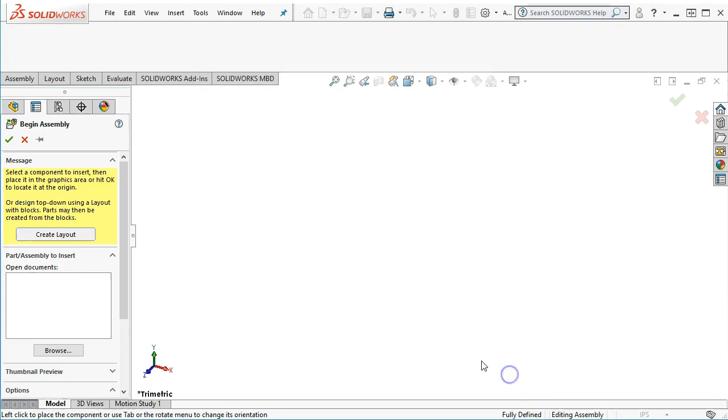Right, so as we go through the process, right now it automatically asked me to bring in a part, which I didn't really want to do, so I'm going to cancel out of that. I don't mind that it starts the command, but I really don't want it to do an automatic browse—that's kind of annoying. I don't mind the preview though.

Making virtual, in a sense—that's what the parallel experiment last week was doing, having virtual components inside an assembly that were being driven, that had those buildups to other pieces. I don't want to overload you with SolidWorks terminology, but give you enough background that you can see where these terms come from.

And then an envelope is a way of managing how big, kind of where the parts all fit into. And the rotate context toolbar—once we pick a part, the little box will come up and allow us to manipulate and maneuver. All right, I don't want to do any of that, so I'm just going to close the begin assembly.

All right, so where I made my first mistake last week was we pulled the parts in, and I made an assembly, and when I went to make those in-context parts—that top-down virtual components for the parallels—I had not saved my assembly. So file structure and documentation, we need to decide on that early on.

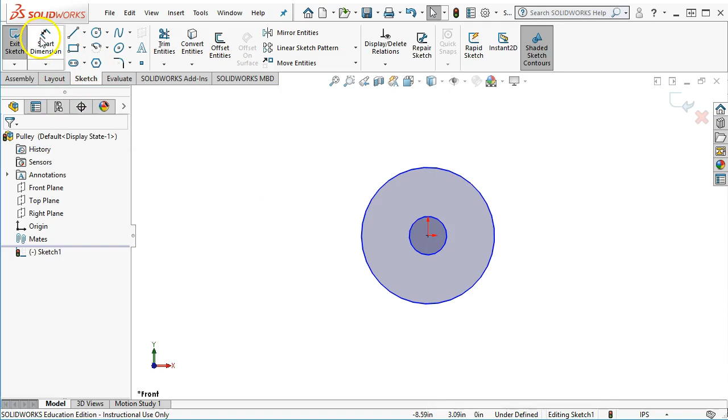And then on the pulley side, I want this to be pretty good size. I want it to be larger than the 2-inch pulley wheel that we had, but I don't want it to be so humongous that it becomes something difficult. So pretty close. I'm okay with the 4-inch, just rounding. And the thing to keep in mind going into the design process is this is an evolving process. I'm making hundreds, if not thousands, of little decisions every step through this process.

All right, and then this is kind of our jumping off point, that as soon as I step into this, I look past those specifications of I want a nice, smooth, rolling surface. I want to be able to hold an 1/8-inch wire that has some twist to it. I want to be able to mount this thing in kind of a clothesline configuration to where I can feed it out and feed it in as smoothly as possible. All right, so there's those verbs that are telling me these are going to be a little more critical when I translate that into the geometry.

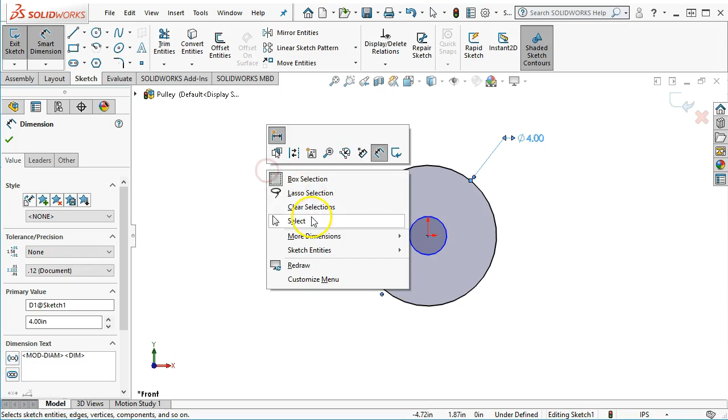Okay, so one of the things we can do, and I like McMaster. So we pull up McMaster.com, and I type in bearing, and we have bearings and bushings, and I would like to just have a standard ball and roller bearing, and I think I double clicked there when I shouldn't have. All right, and then we start again kind of going through how much do I need, what do I want to spend. This is not high speed, there is a little bit of load, but I think I can probably get away with a standard ball bearing.

I don't know that I would want to go to a light duty, use these bearings where high speed and precision are not required. Well, I do want a little bit of precision, so maybe not on that mix. I haven't seen the hex bore. Those are kind of cool. Electrically insulated. That would be kind of nice if we were going to drive this or had any kind of static coming off of our system. So let's just go into the standard, and then we'll pick a style.

So the open style is, all right, so when we talk about lubrication, permanently lubricated and shielded, and then actually going to sealed. So you kind of look down through the descriptions, dissipate heat, block out dust and contaminants. That's kind of important, especially if there's any kind of plastics that are going to rub, and as they rub, they're going to pick up the dust or create their own dust. And then the sealed bearings block out dust but retain the most heat.

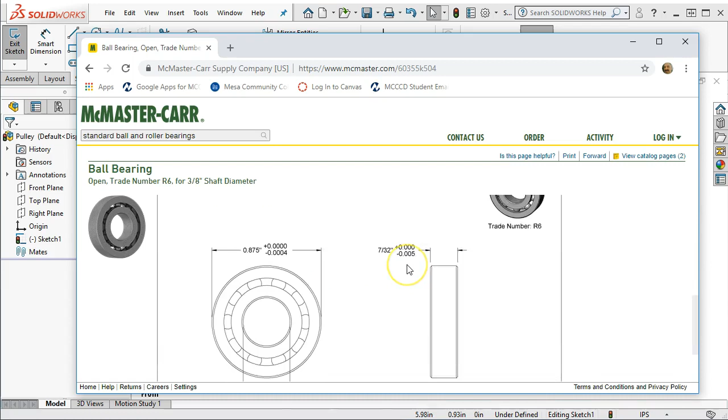So when you're dealing with a company product, we can come over and we'll see that, yeah, I think $6 is in my price range. The OD tolerance of -0.4 of a thousandths to 0. Okay, then I can fit that. And the width tolerance isn't so much of a concern. And at 220 thousandths in width, yeah, I think that would work out on my design side.

And I want to save this to a 3D Solidworks. So it saves. It ends up going over into the downloads folder. Well, let me see, I'm kind of bouncing around here. There we go. So we go into the downloads. I'm going to pick that ball bearing up, and we'll put it over into the documents. All right, so I don't need that right now, but since that's my selection, that's what I'm going to go with.

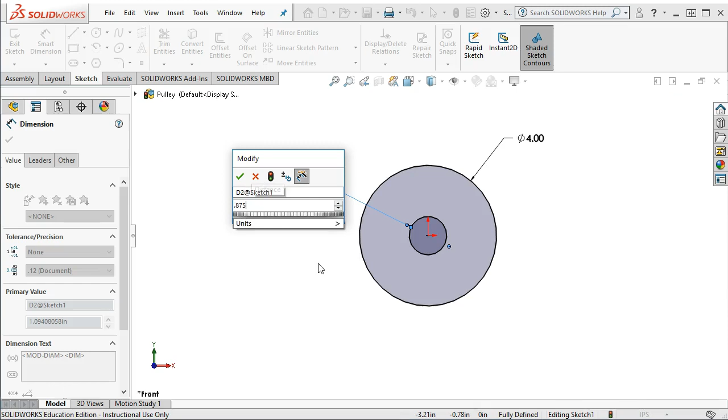All right, so on the design side, I have a theoretically perfect. These pixels are out to millionths, if not billionths of tolerance. The mathematical calculation is that these drawings, these models are theoretically perfect. So the decision we have to make is, do I start out tolerancing them? Probably not. I want to go line to line because that's going to be my fastest way to develop the concept. If I make changes and go through the rest of the process and it all falls out that at the end of the day, that's what I end up with, then great.

If I start making changes when I have a 90-95% complete model, my design is, I am fully committed. We've been through the design review. Everybody's happy with it, or at least I'm happy with it. Then we can go ahead and start thinking about tolerances.

All right, so the 0.875. The one thing that I did not catch is that under the units, and let me fly this in, I do want to work in 3 or 4 decimal places though. And again, depending on the precision, it may be to our advantage. We are in inches. It may be to our advantage to go to 4 decimal places, but at the very least I want 3. All right, so when I type in the 0.875, I'm seeing 875, I'm seeing 4.000. All right, so that is the body of my pulley. So my first 2 decisions were really just setting up this diameter and coming to that conclusion.

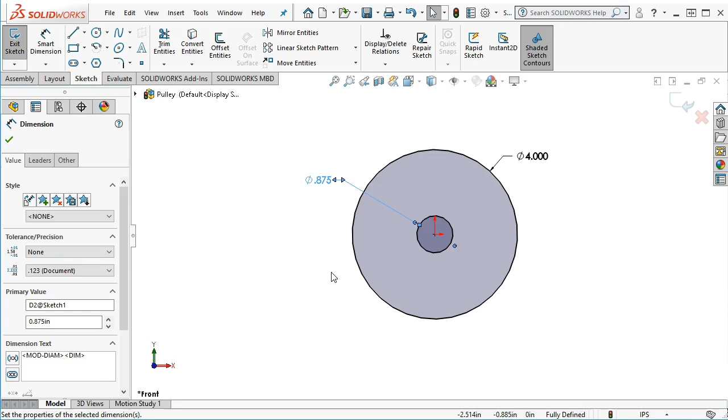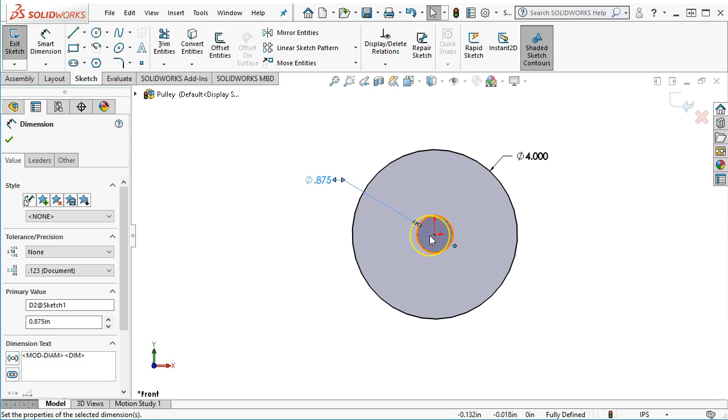All right, so if the bearing face or the bearing OD is +0 -0.4 of a thousandth, then I probably want to make this hole about 874. So there's about a thousandth press fit. All right, I wouldn't want to go bigger. So I got to kind of start thinking that process of how much material am I going to have? What is the most material that I can build into this and still have a working element when I get done.

All right, so this needs a housing. I want to tie this together. So I'm just going to use a center point rectangle and say it looks something like that. All right, so one of the things with the design, and especially on the concept side, is this is going to be a little messy. There's going to be some chaos, and it's by far not going to be perfect going through the first round. All right, so if I were to make this, let's go 4 1/4 inches. So just 1/8 of an inch over size.

And I'm not sure that I want these to be equal. So going back to the relations out of SolidWorks, 4 1/4 by 4 1/4, this may end up being 4 1/4 by 5. It may end up being 4 inches by 6. I don't know yet. All right, so in this case, I'm not going to start driving relations that may end up being in conflict later.

If I can look into that magic crystal ball of design intent, dealing with all of our tolerances and all of our stack ups and everything else, and also be able to see where these relations are going to end up, then I'm going to build in some of that intelligence early and often.

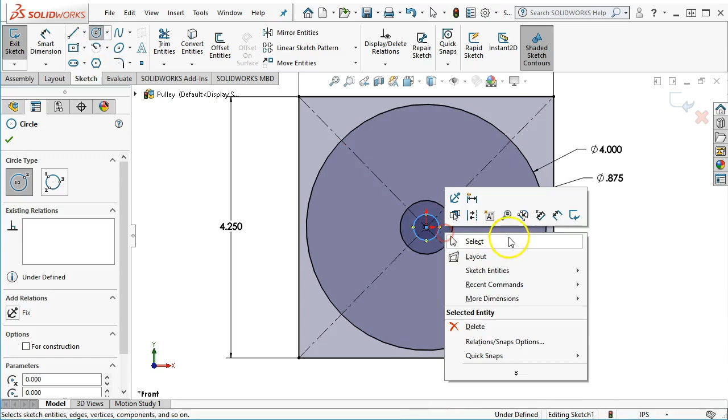So if this is my mounting plate, and let's see, what is another critical piece of information? I need a 3/8 inch hole, and I'm not sure if my load calculation is going to require a bushing to be pressed in so that it can carry. And my materials, we haven't really talked about materials.

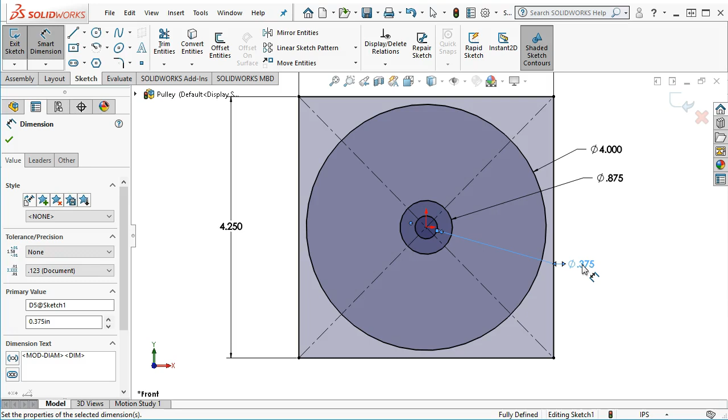I'm thinking aluminum. It has to have some wear resistance, but the amount of use it's going to get over its lifespan, I don't know that it's worthwhile going up to a steel on the pulley side. And aluminum being relatively easy to machine and manufacture, I'm thinking that worst case,

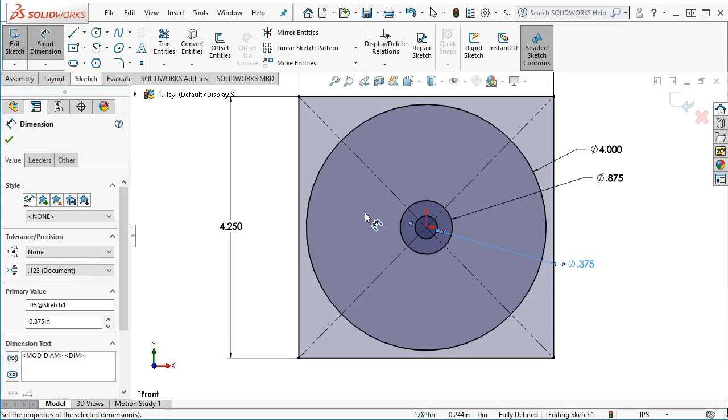even if I wear this one out, I can make 10 or 20 more once I have the programs, once I have the product developed, and then decide, we've run through a bunch of pulleys, it's time to make one out of steel or stainless steel.

So that being the case, I said I was going to have a 3/8 shoulder bolt. We need to look at that stack up of how those are going to work. But a 3/8 shoulder bolt is going to have a plus nothing dimension, or typically a plus nothing dimension. So let's take a look at our shoulder bolts.

Okay, shoulder screws, and we'll probably want a precision. So I'll spend a little bit more money. To go slotted or hex? Natural tendency is just to go hex, with the hex key for the tightening. So shoulder length, I don't know yet. The thread length, 1/8 of an inch. We're in the really small ones.

I need to scroll down a little bit. All right, that looks a little bit better. So plus nothing minus 1/1000th. So that bearing inside diameter, I didn't grab that one on my list, but we're going to look at this being a minus dimension. So minus 0.001 to 0 on the diameter. I should have taken a screen snapshot. Maybe we'll back up and do that.

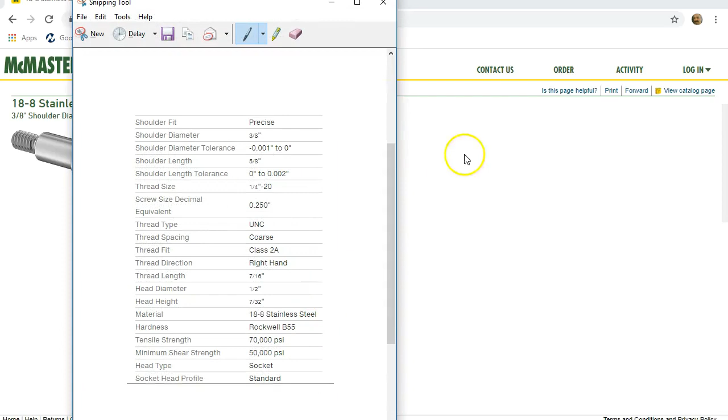And when I save this, I'll save it back to my project. So as we're accumulating this data, the purchased components have just as much effect on my tolerances and my decisions as the parts that I'm going to create and manufacture. All right, so if I back out of that, maybe back up a couple,

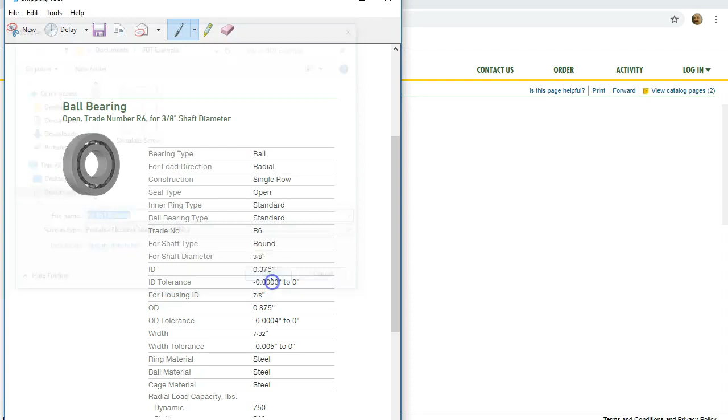okay, so same thing, ID at .375, ID tolerance minus 0.0003, and the OD tolerance minus 0.0004, so we will create a new one, and maybe this time I'll throw the ball bearing description in there. So some form or fashion, whether I print this to a PDF, I need to create that documentation trail so I can reference back to it. And I think that was an R6, so okay, we can get that out of the way.

And then we'll file that one. Okay, so each of those components, each of those pieces becomes part of the effect. All right, so I need to be able to clamp this together, have it act as a shell. We have lots of choices. Each of those choices comes with an associated part.

So if I were to wrap this, I'm going to have a lot of stability if I put a 1/4 inch or a 3/8 inch plate around this, and I would have to grow my mounting plates by an associated amount to leave room for those points. So the other option would be to put a standoff, and the standoffs I could hold pretty decent tolerances, just having a small ring.

And then also it would satisfy the, let's see if we can jump in here, let's see, those are going to be threaded connecting links. Okay, so if I have a carabiner or a threaded connecting link, I need to hang this, attach it so that it goes to a post or whatever. And so if I just were to loop that, I'm concerned about the opening width. I would like to have it for stability meet most of that size and not jump around.

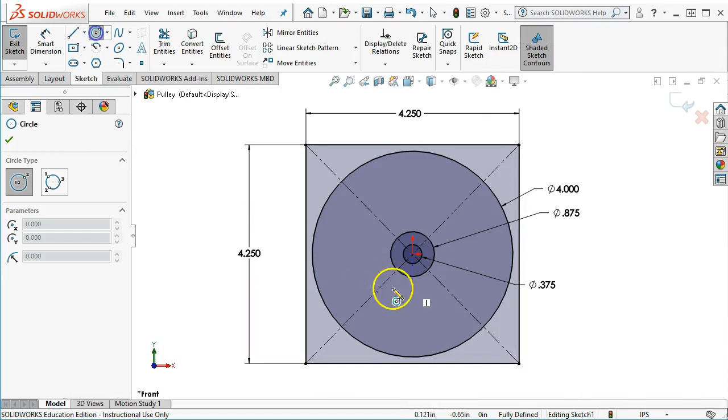All right, just that quick math tells me, am I going to be satisfied with a 3/8? The other thing is that 3/8 on the opening, am I going to be able to force an actual 3/8 in there, or is that not going to be big enough? All right, we've got to start somewhere. So I'm going to come up here to the corner and I'm going to put my first post.

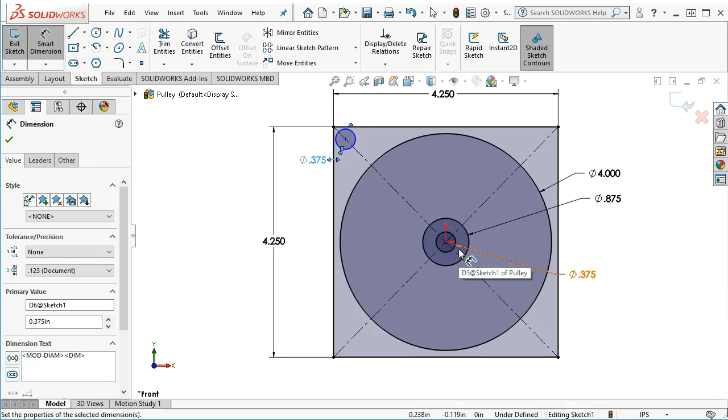And to go through, so after we overkilled this with a 3/8 shoulder screw, which gave me a decent sized bearing, now I'm looking at going to a 10-32 for clearance. So I'm going to put in another piece, and 375 on the diameter. I may have to shrink that a little bit once I determine if that threaded link is going to be able to tie in.

So on the Solidworks page, I think I will have to put it on this page as well because it's one of those handy things to have. We have a formula. So a 10-32. If we're working in metric, that's kind of a different set of clearances, but we're still in the same numbers. So a number 10 times 13 plus 60 should give you 190. We divide that by 1,000, that will give you a major diameter of 0.190.

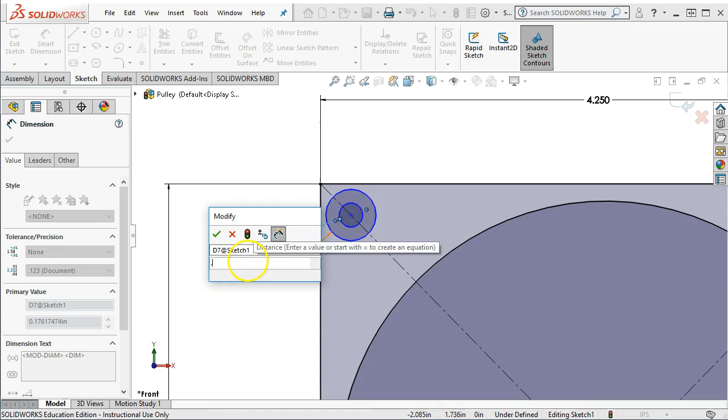And then depending on how much I want to allow this piece to move, right? So if it's at 190, but manufacturing processes, it's going to be about 187, 188, so right there at 3/16. I don't want to have to pound it in, but I don't want it floating around so much that it becomes kind of a headache as far as assembly or otherwise. So maybe we'll go with the 190. And again, that's something that I would want to tolerance later on.

All right, so coming off of the side, that loop is going to kind of come around this way. There's a little bit of gap. The thickness at, let's see, that thickness at 9/32 was that it? Probably need another picture. Let's see. Yeah, so this is where being able to manage your fractions comes in handy. 9/32 is 281. The bearing that I picked was 7/32, and that would be 219.

So there's a little bit of an issue all of a sudden with the thickness of this piece unless I want to do more design and create clearance in these plates to make that work. All right. Decision on top of decision on top of decision. And we have all of these decisions to make before we ever get to the really serious tolerancing. All right, so I'm going to kind of speed up a little bit here.

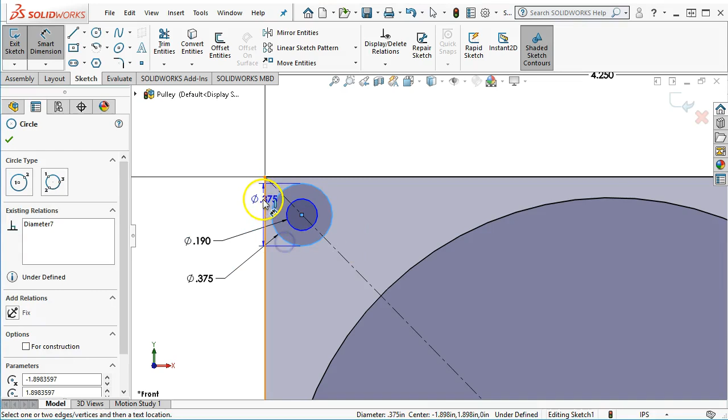We'll give it at least 1/4 of an inch. That puts it in place. We'll go with a couple of center lines, and I'm looking for the origin over to the midpoints. And at least for right now, I think that I want this to mirror. And then I'll take those 4.

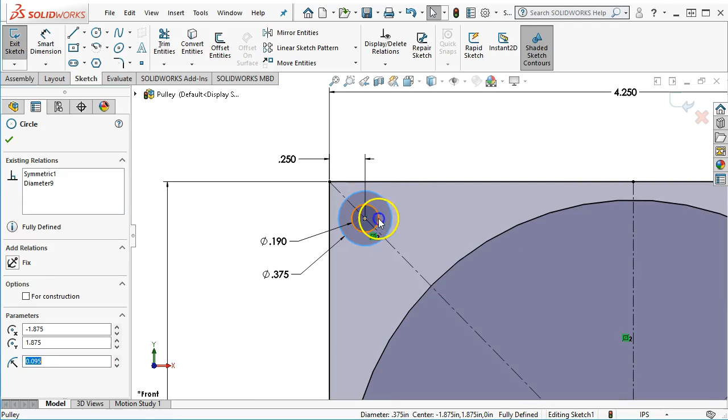And after I have the 4 corners, then that gives me a location for those pieces. So I think we've spent enough time with the design portion of it, considering those tolerances, building up into those tolerances, but it's time to make some parts. And let's go ahead and make sure that it gets saved.

Oh, that was interesting. I didn't think I told it to. But that did the end result. And so my sketch 1 that has all of this geometry in it is now going to be a layout sketch. All right, so again, I'm going to provide you with these parts so that you can put them into the drawings to apply the tolerances, the dimensions, and go through that sequence.

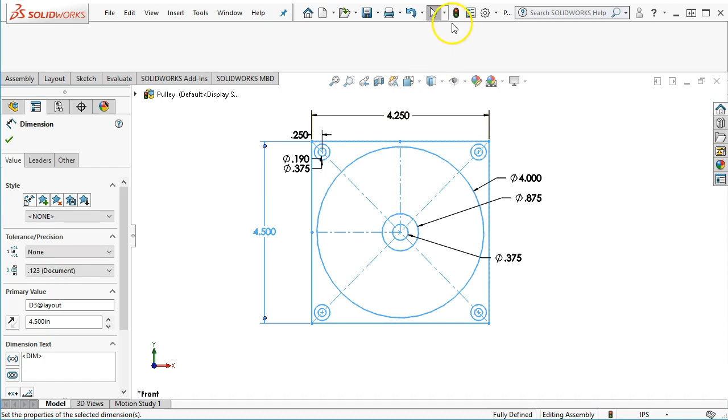All right, so looking at this, one small problem, one very big problem is that if my cable comes over and wraps around the pulley this way, I've now run into 2 of my standoffs. So I'm going to have to make adjustments to my height, to my geometry. This is where it plays out. So if I go up to 4.5 and then rebuild, well, I'm still not quite tangent.

So I'm going to go back into that sketch and we'll use the center line. And I just want to see, I'm envisioning the wire coming in from the right there. So bring it off to the side. And so, well, I don't know why I did that. So apparently my left button is a little touchy.

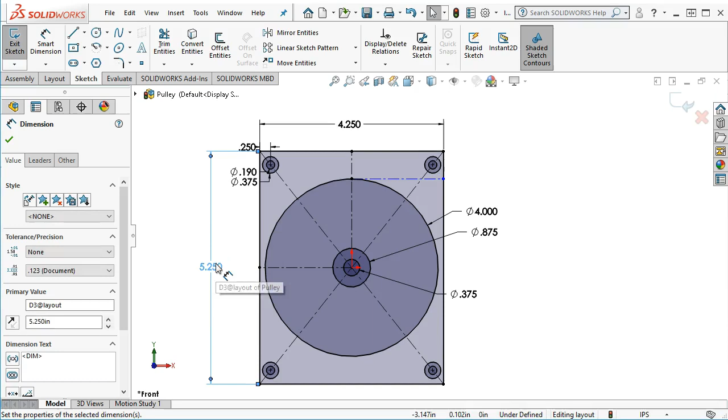All right, so at 5 inches in height, all of a sudden the cable is just barely clearing, and I don't want it to rub on the bottom side of that. So maybe we're up to 5 1/4. All right, I don't think that's going to affect the balance, but I now have enough clearance. Oh, I guess I should make sure, since that didn't get a horizontal relation, now I have enough clearance that even as this moves around, it may rub on the standoff, but it's not going to affect the clearance.

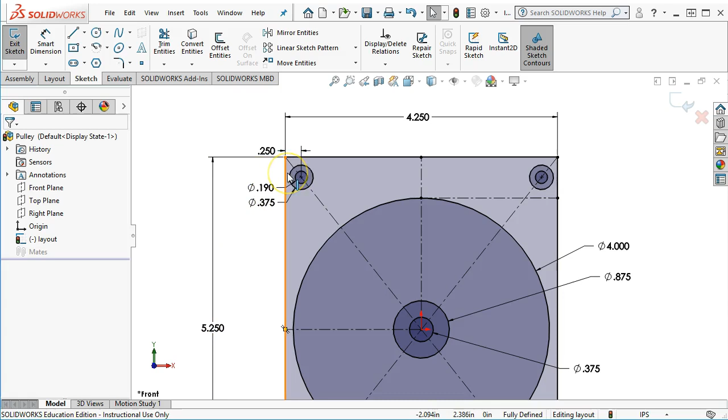So the other thing would be that at .375, if I was to bring this up closer to the corner, I really don't need this extra material. So as I play these what-if games, if I bring that down, do I want to go to the fractional? Yeah, let's go 3/16 on the fractional. So .1875. And now I have quite a bit of clearance. I can bring that down to 5 inches. I'm still at a nominal size.

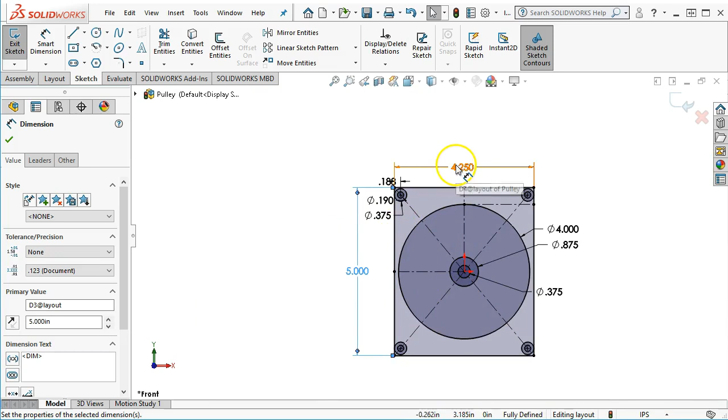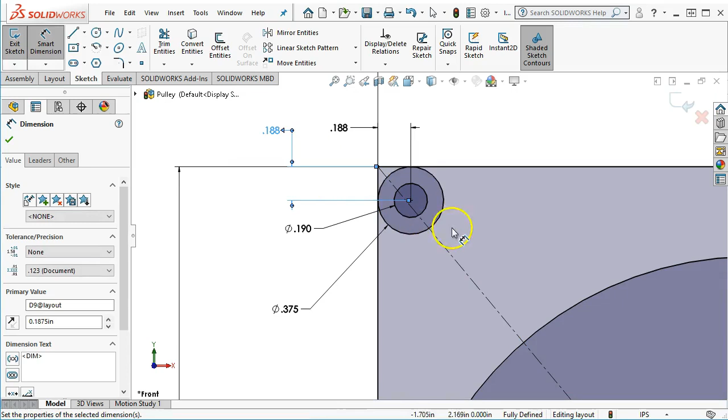And at the very worst case, is it going to hurt anything if, and because it's not a square anymore, my assumption of the relation now has a small problem with the gap up here. All right, so do I want to make this 5 by 5 so that I can keep the 45 degree? Probably not. I think it's going to be easier, understanding the problem with the relation, that I can break that coincidence. Come back, .1875, and now I have tangency to both corners of the part. And I can check it against each of the corners, and now I have a lot more clearance.

So can I get to 4.75? I'm trying to minimize my material usage. No, right back to where I started. 4.875. Okay, maybe. But I'm having the gut feeling that 5 inches was a good number. All right. So in the design process, we're going through what are our nominal numbers, what kind of dimensions can we get away with, and then once we have those dimensions, now we're kind of into that point where we can start building.

All right, so we go back through what we did the first night of safety. Do I have pinch points? Am I going to hurt somebody with this? Am I going to hurt myself, because I'm probably going to be the one operating this? As I move this back and forth and I'm running the cable in and it catches, I have this opening. I haven't even created any of my 3D parts yet.

But those are the things that I'm starting to think about, is how can I minimize, eliminate, otherwise make this thing safer. Well, part of the problem is going to be until we actually have something that's operational, I'm not quite sure where that one's going to fall out. All right, so let's go with.

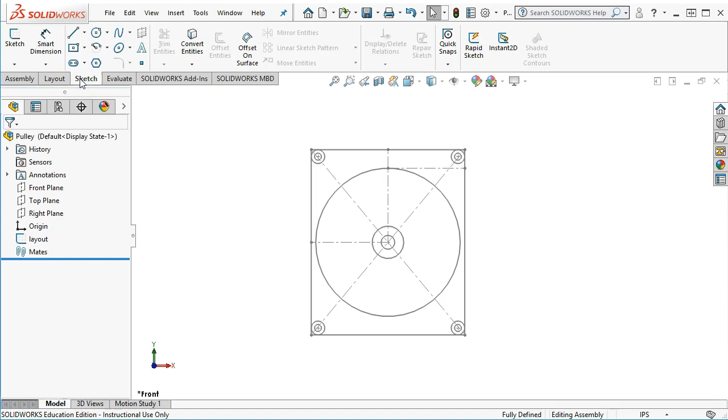Okay, well, we have the layout. In SolidWorks there is an actual layout, and because I've run into problems with the layout and it hasn't really been satisfactory—I haven't checked it in 2019, so I will have to create my 3D sketch and see if it operates the same way I'm used to, and whether the layout sketch creates problems, or if the create layout versus the lowercase layout is still the better option. Either way, I have this sketch that's now going to drive 3 or 4 parts.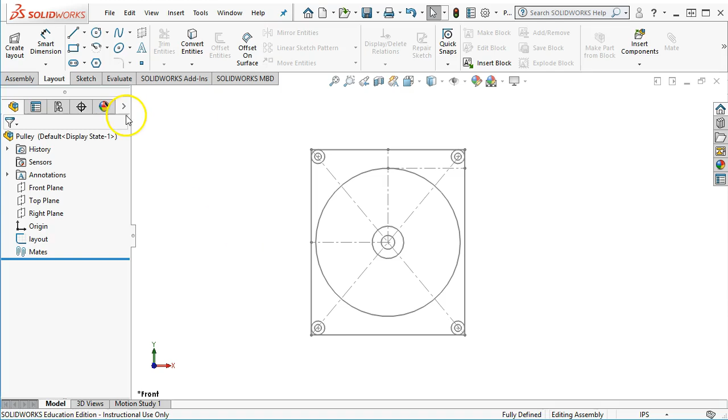So to make that happen, we're in the assembly, and under insert components, I'm going to create a new part. I don't really want to tie it to a plane. And looking at the terminology now, this part is going to be fixed. You do not want to float this part, period. End of conversation. Very bad to float the part in this situation.

Any virtual components, any externally referenced components, they need to stay there. They are being built in reference to this sketch, and anything you do to move them needs to be driven out of this sketch, not the part individually. We can make modifications, but this is that risk element we're talking about.

And then the other thing is with the brackets—these are now virtual components. So our first pass through, these are all going to exist in the assembly. When I take this out into the drawing, I really need to have these 4 separate components. I can do the virtual components, but it makes it more difficult, not less.

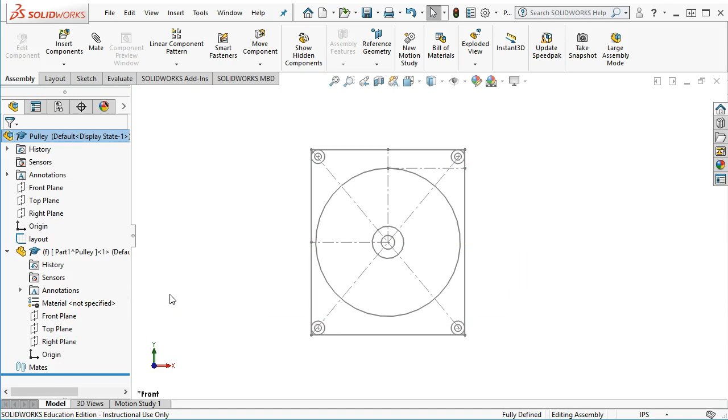So if I expand that out, there's just the normal part that we created, our 1, 2, 3 block. We created some of our pieces with it, and I need to right click and edit the part.

And on the front plane, which now lines up with the assembly, I open up a new sketch, and I think I want to do that pulley first.

So the choice is, I automatically went in to draw the circle, but the choice is that I can convert those entities. So by selecting the sketch item and converting that entity, it's now tied directly to this layout sketch.

In my experience, I have a very high hesitation to tie virtual components and top-down assembly parts to each other, part to part. It does not bother me to tie it to a layout sketch because it's a single point of failure.

Right? If I have part 1 and I tie parts 2, 3, and 4 to the part before it—so part 2 is tied to part 1, part 3 is tied to part 2, part 4 is tied to part 3, and maybe part 5 is tied to part 1 again—and all of a sudden I delete part 2, thinking 'oh, I don't need that one,' I've pulled that one strand of the spider web that is going to cause the whole thing to collapse.

If I have a single point of failure like this sketch, I pretty much have one place to look. I have one place to create those problems and to deal with that point of failure.

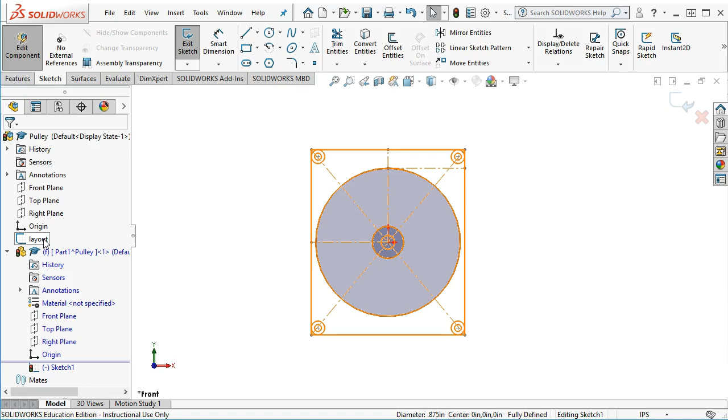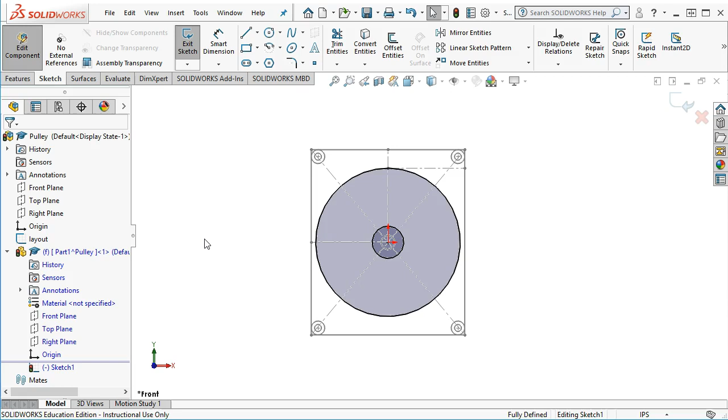So again, this is kind of on the design side, the advanced portion of it. I want to give you the how I got there and the process of making those decisions before we start putting numbers on it. It really does look from the outside haphazard, and to a certain extent some of it is—we're taking our best guesses and building everything we know into these geometries.

So my next one, I could have created a sketch that would also set the depths. A lot of times I would create a 3D sketch, but I figure I'm going to have everybody looking at me like I'm out of my mind anyway, so putting the 3D sketch into the mix, not yet. We'll play with that one a little later.

But this is just like we're in a part, and if I had any other components, they would be in transparency, and the blue is telling me that I'm in that top-down assembly.

I'm editing that part, so we're going to extrude, and I think my 0.22. Now bearings usually have a little bit of relief, so the 0.215. On the manufacturing side, if I'm doing my due diligence and saying I'm probably going to start off with a piece of 1/4 inch, I'm not really going to grab a piece of 3/16 because it's already close to a 32nd undersize. 15 thousandths aside I could probably live with, but if that bearing really took a load, I would want the interface to have a bigger contact patch. So I really want it close to the 218 to the 220 that we talked about.

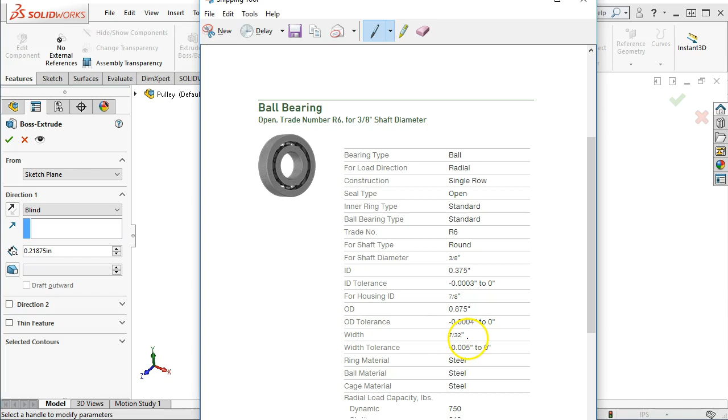So my first guess, 0.21, well, 21875. And I only know that because I've done it a million times. Okay, 10,000 times. 7 divided by 32 for my 7/32nds. 0.21875, which comes back to what we set for the thickness out of the catalog for, now I can't see it, it's right in front of me, the width of 7/32nds. And a plus or minus 5, that becomes part of the deal.

So going to 1/8, maybe I want to take that down to 210. All right, 4 thousandths aside I can deal with. 15, 16 thousandths aside, I'm not so sure about. All right.

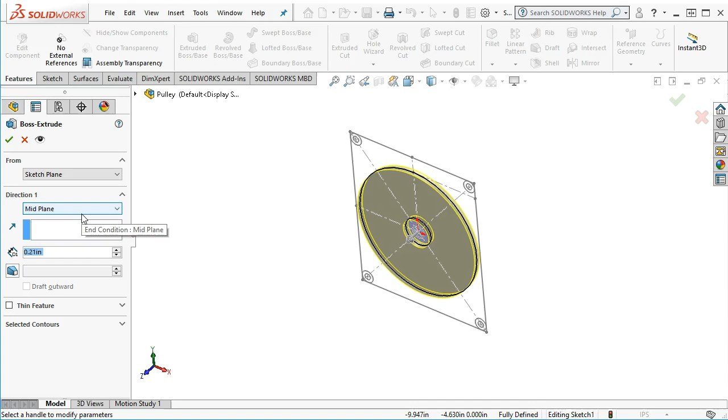So the other thing would be I wait until the bearing's been delivered and I measure it and say, oh, I want it to be the exact same size, but we really don't have that luxury. All right, so I'm going to make it a midplane. I'm going to build this all on the midplanes so that we can drive those dimensions.

And so that creates a pulley. And then I want a V groove. So I'm not going to set this up in a lathe. I'm going to take a 4-inch chunk of material and try to cut to the center.

I'm going to clamp this down in the mill onto a tooling plate, so that whole stack up of subplate to vise to parallels to material, or basically just go from the table of the machine to the subplate, and then I have my clamping. All I have to do is make sure I have the flatness between the table and the subplate, and then that my clamping surface is also flat and perpendicular to the spindle, to the head of the machine, to the tool.

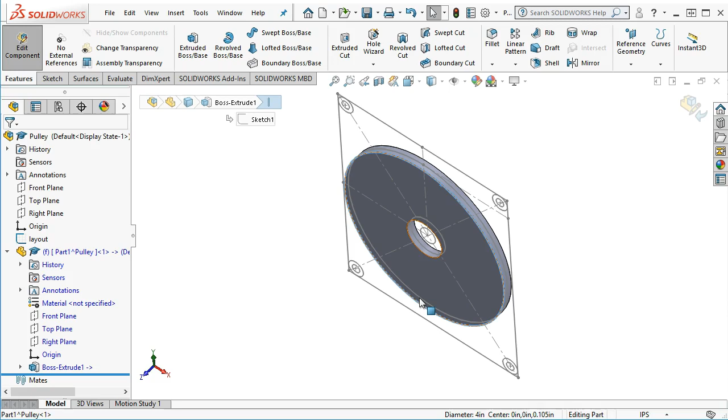All right, so that being the case, I don't have a problem starting off with this material, clamping into 4 corners and machining this flat, and then cutting around the outside, flipping it over and maybe taking a skin pass. Or for that matter, 4x4, I think I could probably hold on to a 1/4-inch piece, take a skin pass, ensure that I have that flatness on the first machining operation, and then flip it over onto its flat to flat, clamp it down, machine this side to be parallel, and then make the outside and the inside cuts.

All right, so that's a lot of machining jargon that if on the design side you don't take into at least some account. Back to one of our first rules was the drawing does not dictate machine process. Right? We're going to suggest, we're going to think through whatever our experience. I'm certainly not going to make this with a hacksaw and a file. Right? And so going up to, even if I put this, I drill the through hole and I clamp through and I turn this on a rotary on a manual machine, I'm still going to have to pick equipment that's capable of holding the tolerances that we're determining in our process.

All right, so let's see, that is on the midplane, so I'm building out symmetrically. And so the bearing, so I need to get out of this. Oh, no, I don't. One more. So I'm going to go ahead and complete my design on the top plane.

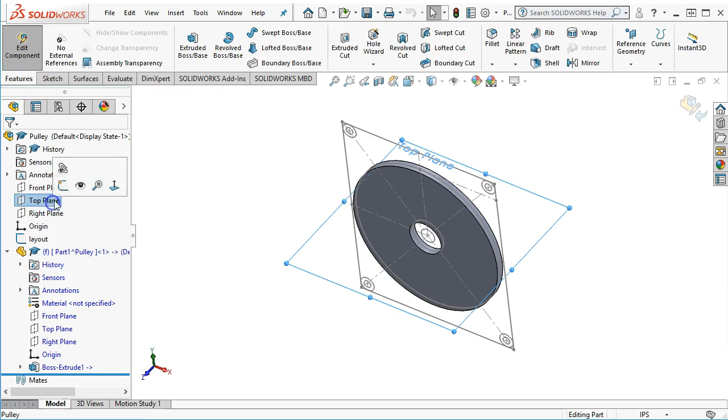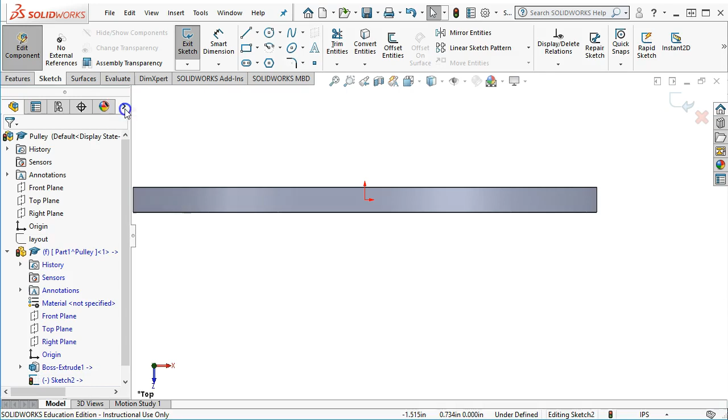And I want to temporarily hide, so if I right click, I can click on the little eyeball, or we can do the little flyout, and the first item will hide that sketch. So I kind of want it, I wouldn't mind it being tied to that sketch, but for the most part, I'm just going to create my V groove. So at 220, that's a little bit deeper than I wanted to go.

I have this habit from creating swept threads, and I'll stick with using a thread mill that I can come in with a 60-degree sharp V and just make a pass. Even if I had to do this in two steps—clamp half of it, run 180 degrees, clamp the other half, run 180 degrees—I'm reasonably confident in the machine and tool to line those up without a crazy tolerance.

The other thing was, we said we had an 1/8-inch cable. I do not have a construction circle, so it's going to be about 125. Oh, and my parts—

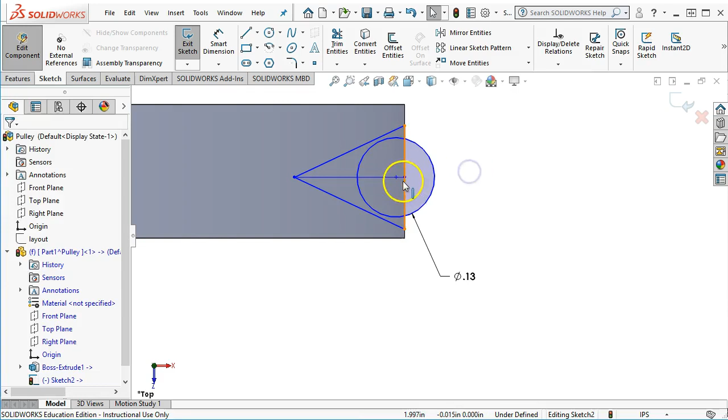Staying on that, so I'm going to add—did that get a midpoint? Oh, that did get the midpoint. All right, so we want to, I don't want it to be right on where it can roll up and over out of the edges, but I don't want it to be completely subflush either. So I need a tangency, considering how that moved.

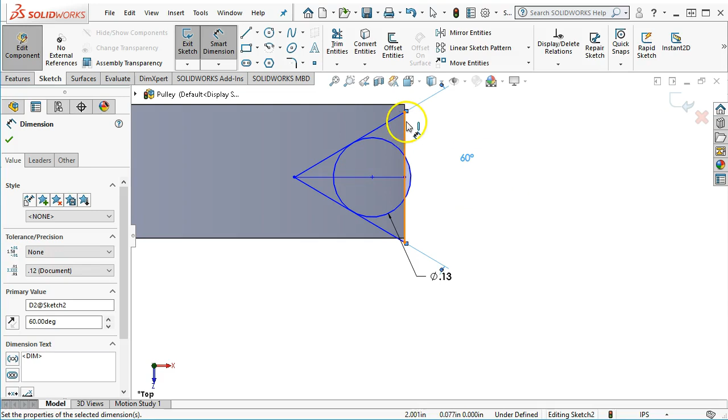And I know that the tool I'm thinking about is 60 degrees. So that really doesn't look too bad, except the height is a little on the annoying side. Maybe I'd have to measure that tool, but if I could get it engaged at 190, there's just a little bit sticking up.

And I have the angle, so what else is able to move? So that didn't quite get to—oh, it went to the midpoint of the other one. All right, so—

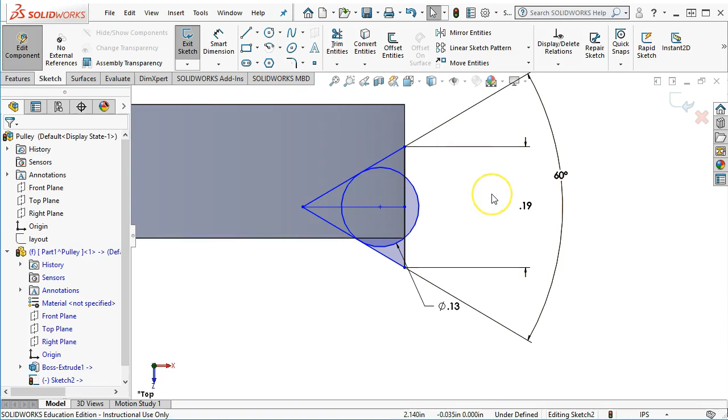Coming across that face, nope. I'll make sure that I'm completely looking at it. There is supposed to be a silhouette edge, but I'm not quite getting that, so that's annoying.

So I'm going to go to the next trick in the bag and make the center line coincident with the origin, since I went to midplane. Now I'm kind of stuck with that midplane. I really wouldn't want to change it because it's going to change how this V interacts with the other part.

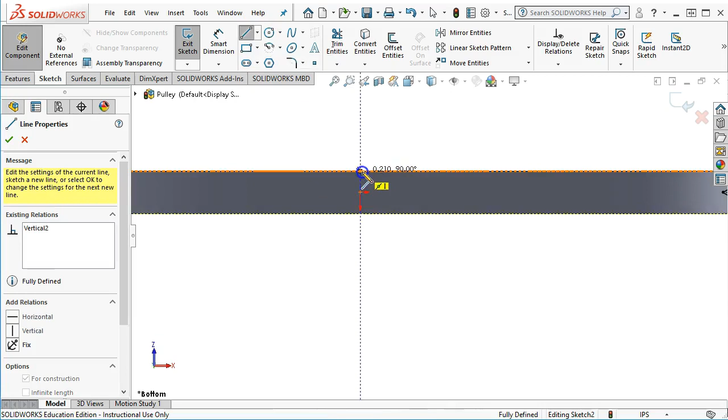All right, and then next, since we don't have a construction circle, I'm going to switch that to the circle. Then I need one more center line to act as my axis of revolution. On the features, I want to revolve cut—we're removing material. And because there's more than one center line, I'm going to pick that line and make that my V groove.

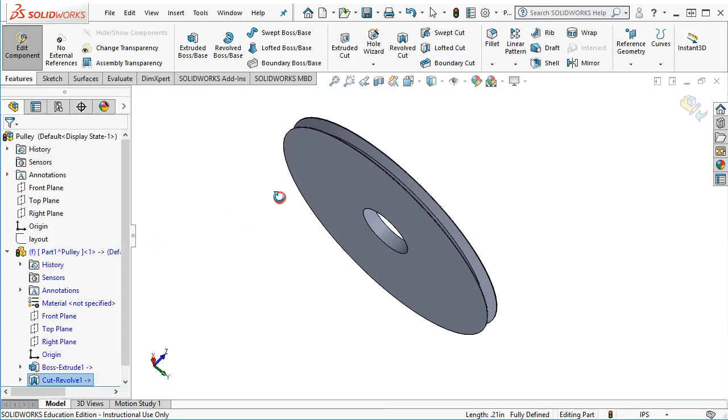All right, so all of that to get to the pulley. Then I'm going to rename—so this is the pulley, and the pulley assembly. All right, so we'll see if we can get the design going.

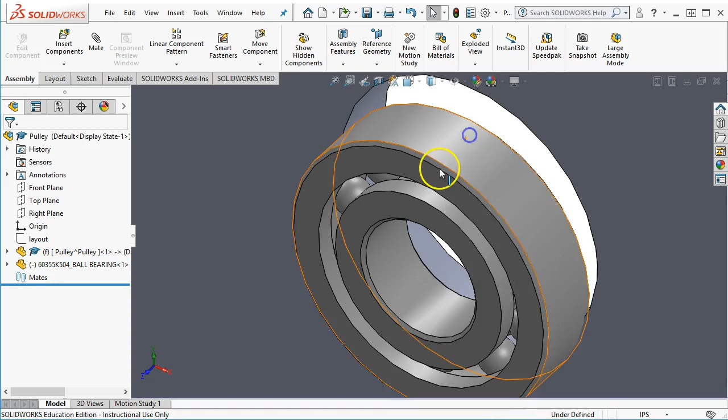All right, so the check is that I need to insert a component. I'm still going to use my layout sketch, and the McMaster-Carr models have this habit of the revolve sketches—the sketches in general—coming in with their geometry. Okay, we get that cleaned up.

I'm going to make concentric, and I know I'm going through this kind of fast because I'm not really expecting that you will—well, that is on the midplane—that you will want to create all of this geometry.

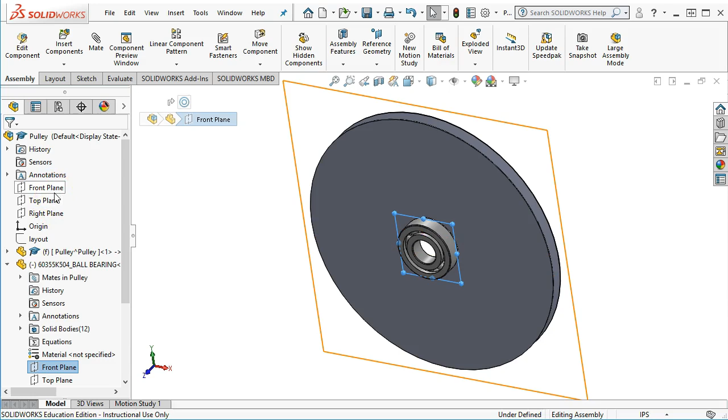All right, so the front plane to the midplane of the bearing will go coincident. I look at it from the front, that looks pretty good. Look at it from the side, I have a little bit of protrusion. All right, so that's my clearance, so that I'm not rubbing against the side plates.

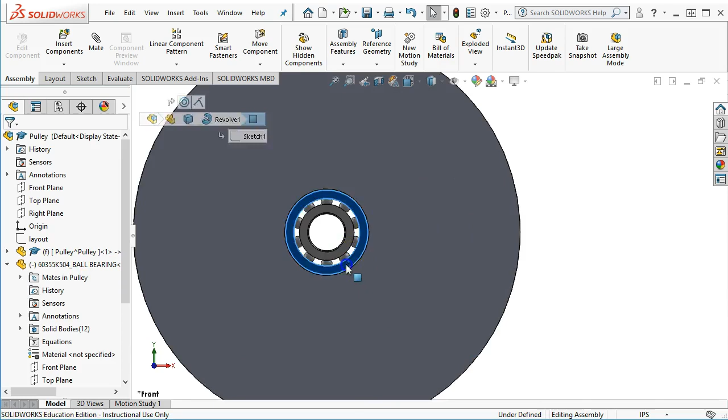And then as far as being able to turn, all right, so with that concentric mate, there is a lock rotation, and that will get me to the point where the minus sign goes away—it doesn't move unexpectedly. I know that this is going to turn, so I really don't need to see it turn. It's a circle, or a cylinder—there's not really much there to worry about. All right, one more.

All right, so let's go with the plate. And so another new part—no, I don't want to tie it to anything. This is going to be, if I go with a mount plate, so naming versus numbers. At some point your company and your design team should have already resolved this.

So, a lot of times, at least for now, since it's still in a virtual state, I will do plate 1 and plate 2, or plate left and plate right, front and back—something that makes sense but isn't really that critical.

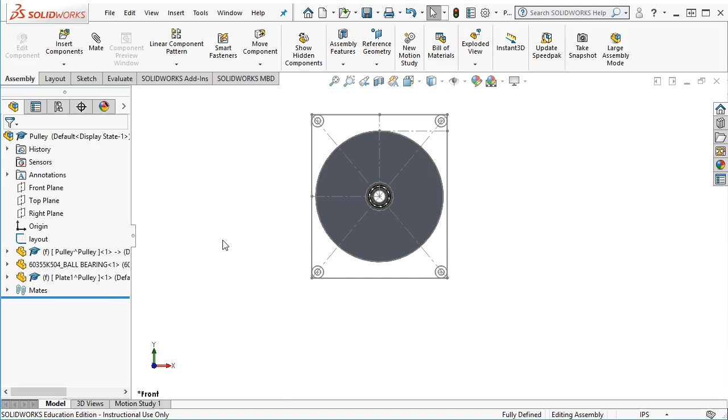And so I'm editing the part. We're going to pick up the exact same thing. So the advantage of the 3D sketch, or having another sketch to set the depths, is that I could drive all of these depths from that sketch. All right, but that again is another level that I had to screw up a lot of parts before I kind of developed that technique.

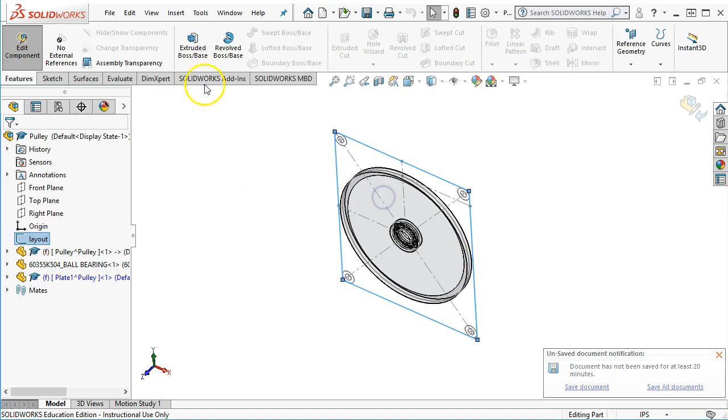All right, so let's go ahead and select the chain. I'm in the sketch. I'm going to convert the entities again. No, I'm not in the sketch. Let's go to the front plane inside of the part and open up a sketch. Now I can select the chain, convert the entities. All right, so you can kind of get a sense that this is a very fast process. Once I put the development into my layout sketch, then I have all of these things to work from.

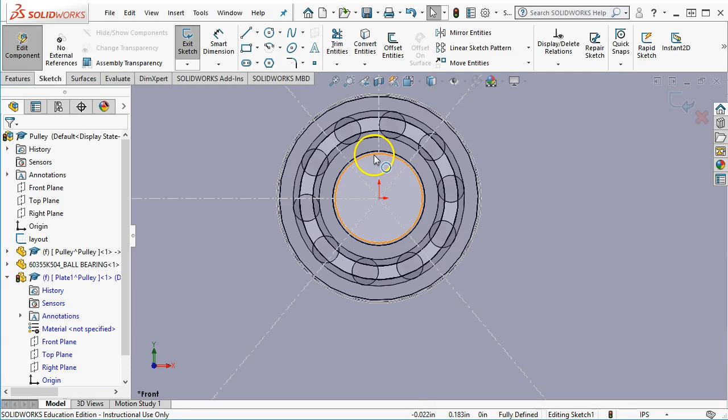All right, so on this one, we're going to have the clearance. And actually, since it is the clearance, I'm just going to go ahead and we'll convert those entities as well, and then the through hole for the shoulder screw. Right? And then we go back into the features, do the extrude, and now this is starting on that front plane. I want to shift it. I'm going to offset it.

Let's see, we're at, what do we say, 7/32nds? Well, that makes it nice and complicated. How about 0.21875 divided by 2? So 109.3. Ugh. All right, so can I live with a 110 there? A little less than a thousandth. And the bearing has the potential to be up to 5 thousandths small. And my deck is already at 110.

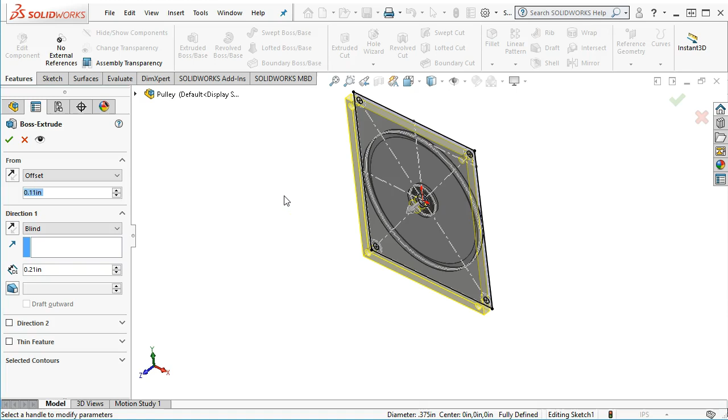So, again, I'm shifting one way, and now I'm shifting the plate another way. And it also helps a little bit with math that the standoffs will basically end up at 220. Right, and then I don't really want to do a lot with this plate, so if I make it 250, then we're shifting the sketch. Let's go to the top view, and maybe we'll see it. So we've shifted it over to have just that little bit of clearance to the bearing, and then whatever thickness I've created for that plate.

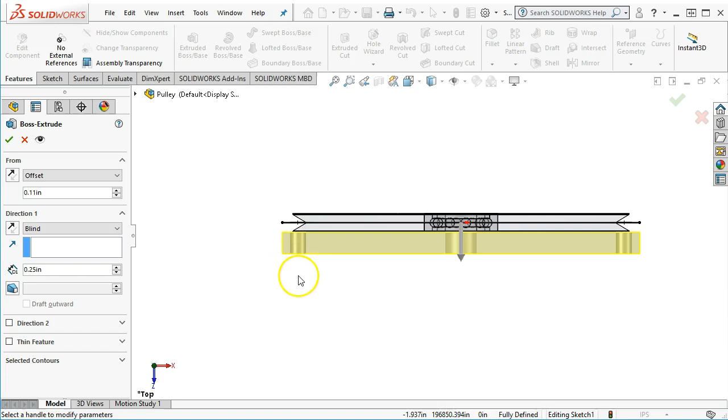So the flatness tolerances, the runout tolerances that we're going to start considering is, if this wobbles, it's going to rub. And then if it rubs, it's not going to be smooth, which was our initial design criteria. Okay, so I'll go ahead and accept that one. And I look at the plate. It's pretty straightforward, has the geometry in it. And then I can go to the next plate. So we'll accept that one.

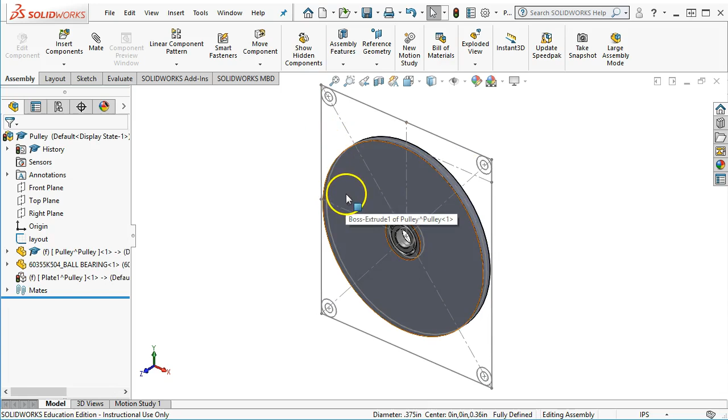And on the keyboard, I'm just going to hit Tab, and that will hide the components. I'll just go down the list. It was getting kind of busy. And one more rebuild, one more save. And it's going to warn me that my virtual components need to be saved. And I need one more, so let's see, insert component, new part. And the difference here is that on this side we created clearance holes, on the other side I need threaded holes. So don't want it to tie to anything.

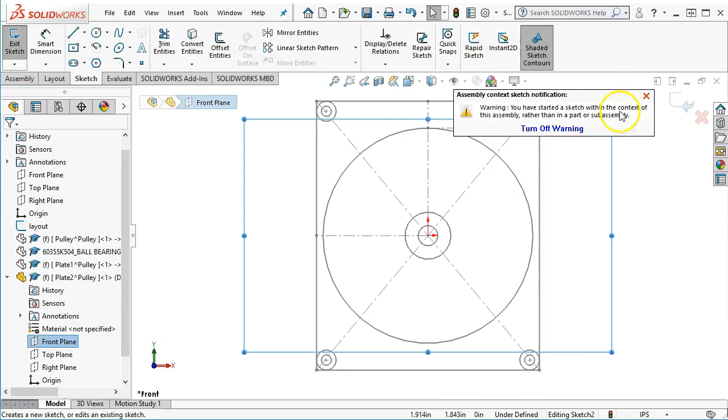And so this is going to be plate 2. And if I think about naming first, then I will usually name first. If not, then we pick it up. I have started a sketch within the context of this assembly. Oh, so that's a nice little warning that they came up with, is I'm not actually editing the part. And the sketch that I created is down here, so everything that I build will be at the same level as this. So that's not really what I want. We'll discard changes and get back into the part.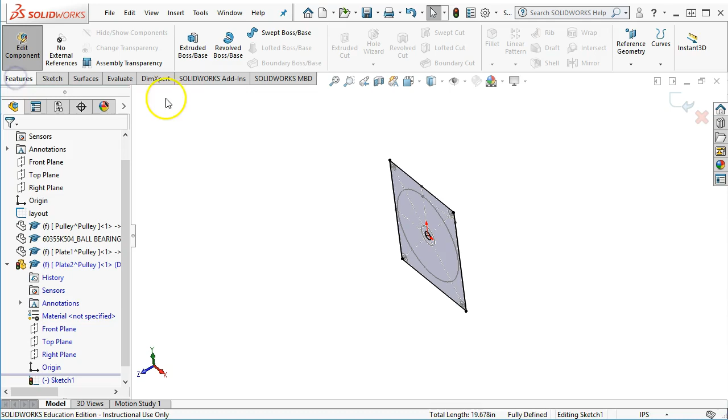All right, so same things. Select the chain. I can control select the through hole, and I want to. Oh, I still didn't get a sketch. Darn it! All right, so the front. Now I have my part. Just did a quick check. Convert those entities. And then same thing, except now when I go to do the extrude, we're going to offset it. We set 110 thousandths. And I want to offset it the other way. And then I want to reverse the direction.

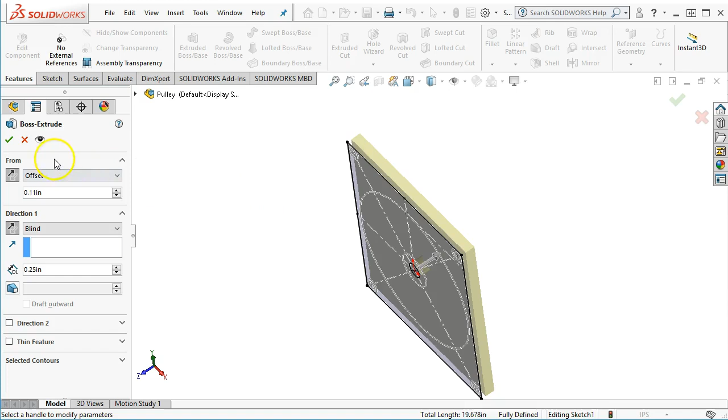So on the design side, it's a little bit weird to pick that sketch up, move it over 110, and then continue in that direction another 1/4 inch, but it gets us to the desired result. All right, so what I didn't do was the threaded holes. I want to do that with the hole wizard. So I'm picking that face, and we pick up the hole wizard. This is going to be threaded.

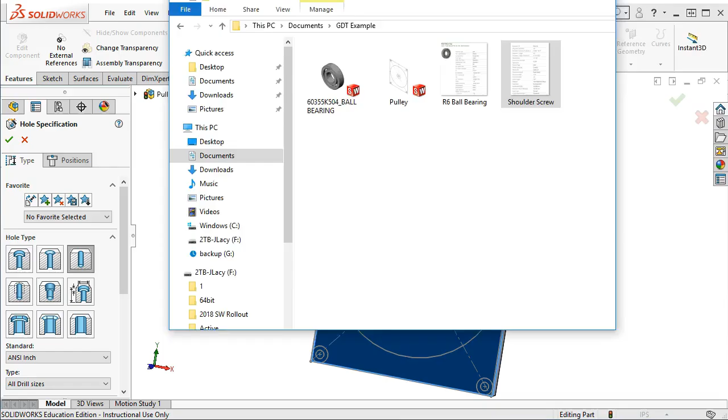And let's see, I took a snapshot. What did I do with it? And do I have my previews turned on? Maybe not. All right, so large icon. Oh, there it is.

All right, so thread size was 1/4-20. Want to make sure to get that in. So actually, oh, that was for the through hole, so I can pick whatever I want. I picked a 10-32, so as long as it has that compression from one side to the next. All right, so I got myself a little confused there.

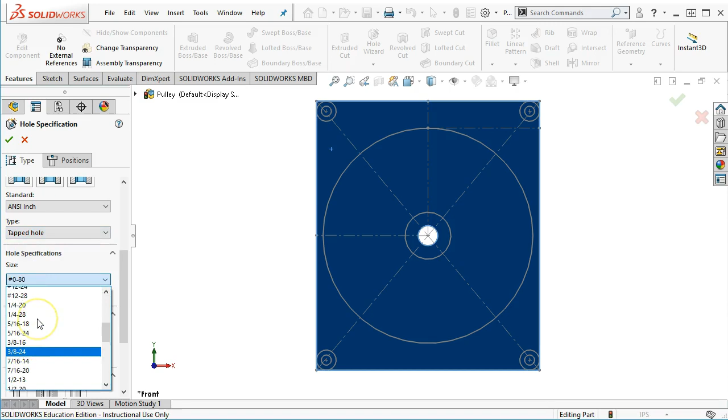ANSI inch, all drill sizes. No, that tells me that I'm creating a clearance hole, which I already have. I want threaded, and we're going to do a tapped hole and go to a 10-32. And it can stay through all. I don't need countersink. We'll leave the callout. Class 2B fit is pretty much standard.

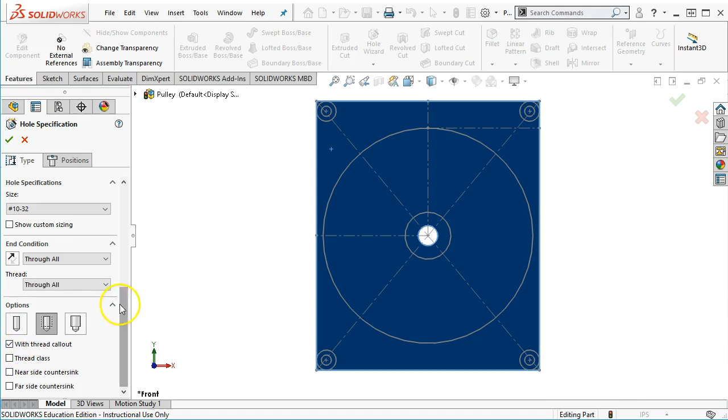We can include that, and that's going to be pretty much another whole discussion of Class 1, Class 2, Class 3, and then the H classes in metric. All right, so positions. Advantage to the layout sketch is I'm just going to pick those 4 points.

And accept. And now, because these parts are symmetrical, when I go into the drawing and I start tolerancing, I'm not as concerned about, if this side is flat, that this side has to be parallel. For the most part, I don't care about this side. As long as it engages and I have the clearance, those are my critical dimensions. The outside, as long as everything clears, I'm considering it good.

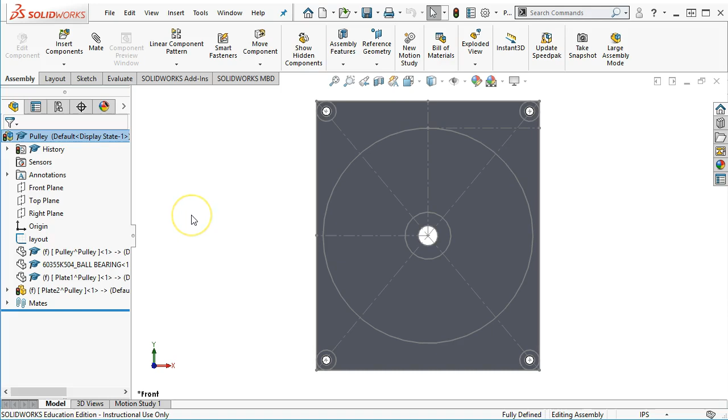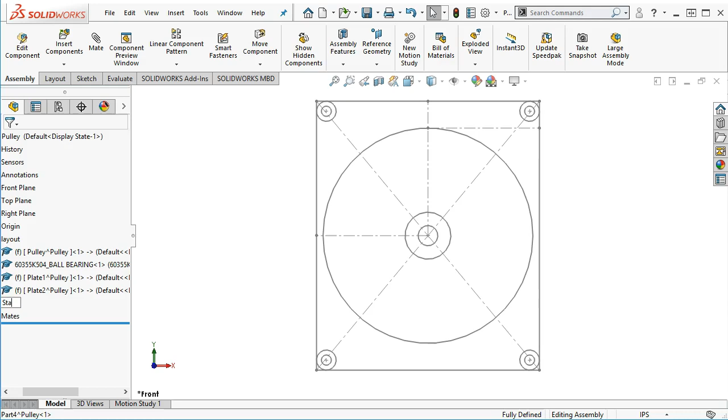All right, so the one thing with the assembly then is that let's go ahead and hide that one as well. I have one more part. I don't want to make 4 standoffs and have 4 separate parts for each of those standoffs. I want one. All right, so one new part, and we accept. And I'll probably just stay with the standoff since that is what I called them. All right, we edit the part.

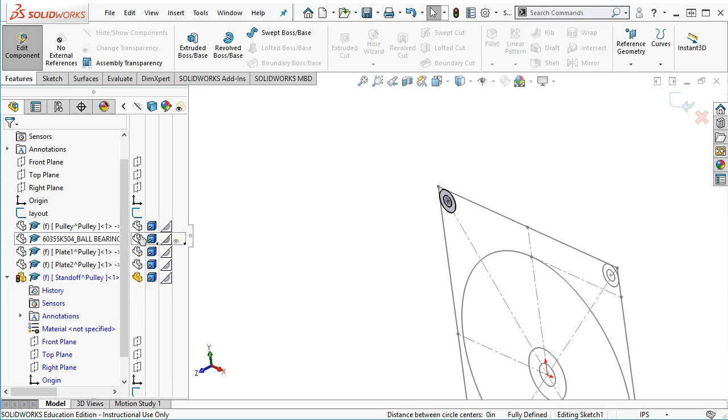I open up a sketch on the front plane. And then my standoff looks just like that. I convert the entities. And then when I go into the features, now I actually need those 2 plates. Well, I can put it in as 220, but I want to illustrate the tie-in to the references. All right, so that's actually going to be kind of small, isn't it?

So the features, they get extruded, and we're not doing a from. We're going to go both directions, so up to surface, and then direction 2 gets an up to surface. And then if I decide to change the thickness of the pulley, now I have that part driven by the gap, driven by what I've determined as my offsets. All right, so having done that, I'm going to hide one of them again and accept.

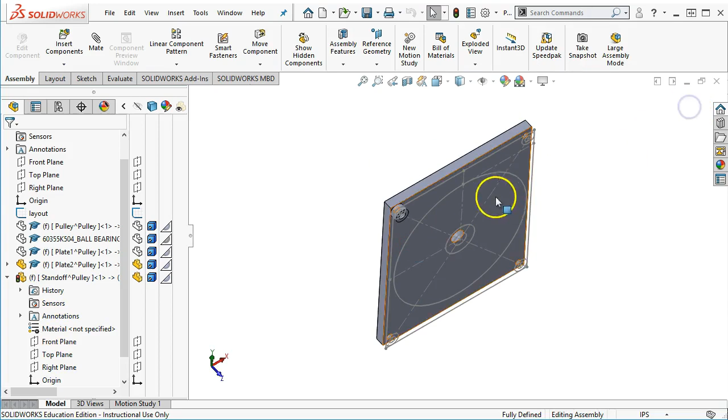And when I open this, I'm going to make my life a little bit easier. Let's see, where's the origin and which way is it pointing? Kind of that way. So if I pick this edge, go into the reference geometry, set a mate reference. All right, so all of that means that I'm going to be able to drag and drop this component and not have to apply a bunch of mates. So at this point, except for the bearing, we really haven't applied any mate references. Everything's tied to everything else, so we've made a big spider web of interconnected parts at this point.

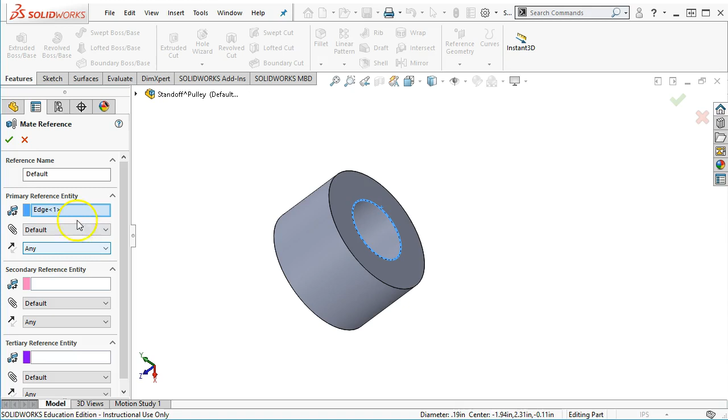So I accept my mate reference, I save this, I close it, and now the advantage, I can hide the layout, and I'm going to control select my part, drag to the next one, control select my part, so that mate reference gives me that ability to very quickly, and then I have to decide if I care if they rotate. I really don't. All right, so those were all of the standoffs. Let's go ahead and show everything.

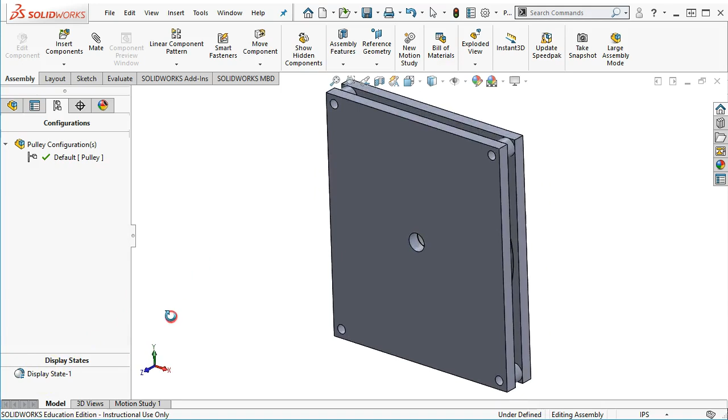So this is also where, on the SolidWorks side, is when you get to configurations and display states. This is where I can do mid-assembly, complete assembly, or otherwise. All right, so I said that I need to make a decision on the threaded connector. We'll probably end up going with a smaller one. These will have to shrink a little bit, but I want to close out the part. And now we're to the point where we can make some drawings and start to develop our process.